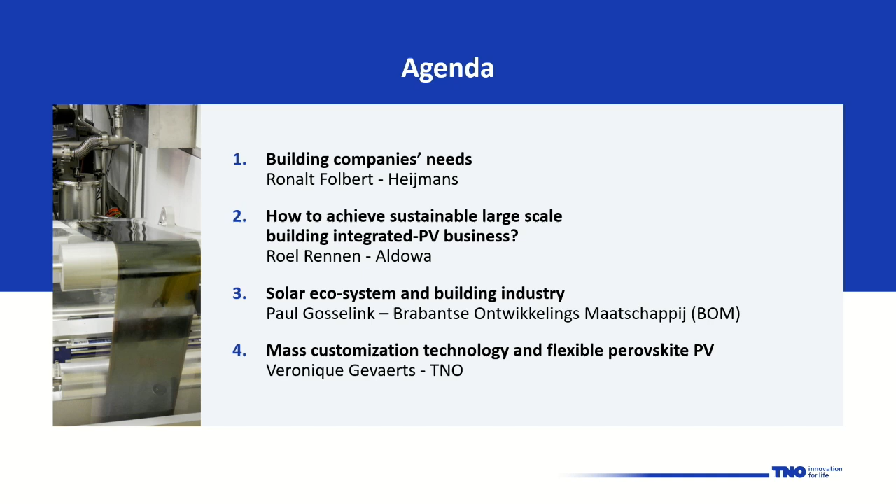In this webinar we will start with the agenda. First Ronalt from Heijmans will discuss the company's needs for buildings, and what their vision is for energy supply within those buildings. Next, Roel Rennen from Aldowa will explain how this can technically be done and what they are doing as building material suppliers. Then Paul Gosselink from the BOM will talk about the ecosystem in Brabant and their vision on making and manufacturing PV in the Netherlands and Brabant specifically. Finally, I will tell you about the technical status at TNO and where we are with mass customization technology and flexible perovskite PV.

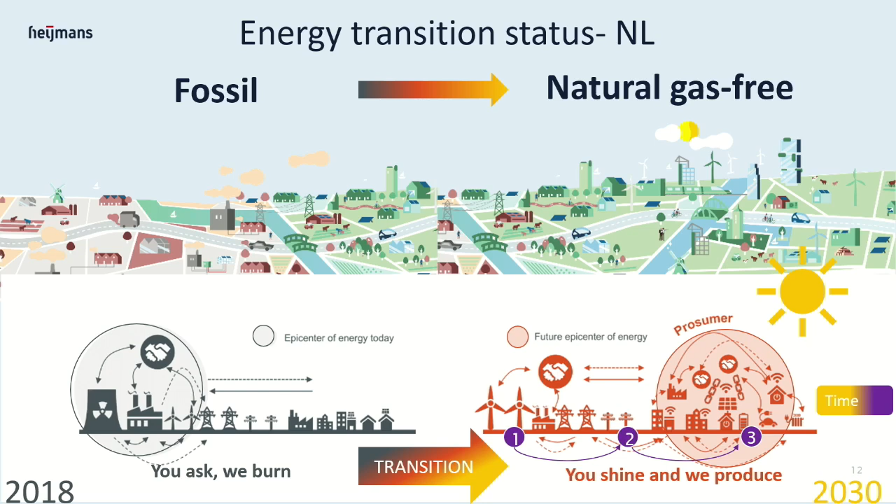And we are now changing to the right side. In the purple, you see the steps. Since 2018, from my perspective, we are changing from a central network more to a region.

And for number 3, it's more in the area what we built for, so there are more districts. We are already building energy positive houses, and in the future we should also build positive energy districts. Therefore we need PV more in our area.

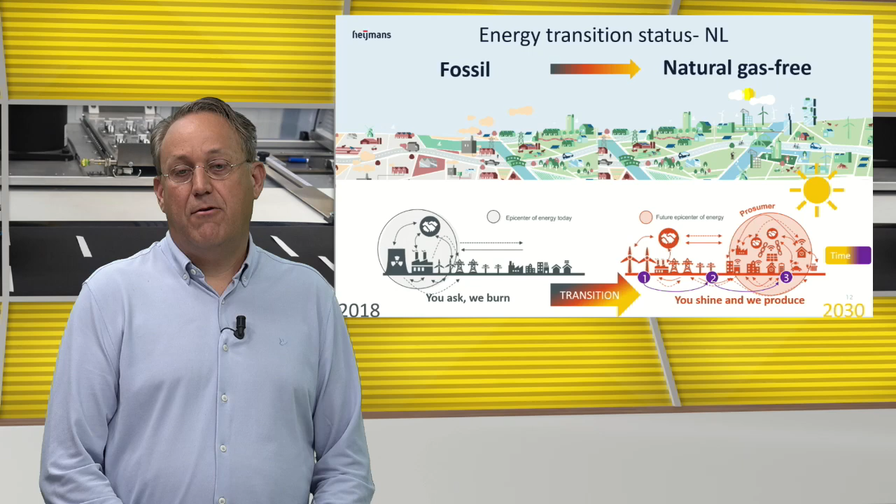That's the reason we think we should make more impact together with you. For that reason, building integrated PV is something we need, because we don't want to load the network. Financially it's also important for the consumers. An issue is still the regulations, and that's the main one, but that's coming later in this presentation.

And to be sustainable, it's also necessary that we make local building integrated PV here in the Netherlands, so people can lay back in their chair and enjoy. So what we like as Heijmans, we take care of each other and make sure things get done. Together we make it happen.

It was a short notice. Later on, more technical information. But I want to hand it over to Roel.

Thanks, Ronalt, for your vision on what needs to be done within the built environment. I'm very happy to hear that Heijmans Energy is, yeah, it was brief, but it's good to know that you're very, very committed to this topic.

Having said that, to be able to build, or for Heijmans to build houses of the future and have building integrated PV there, of course there's a need for suppliers that actually make this building integrated PV. That part will be covered by Roel Rennen from Aldowa, who will tell us a bit more and share insights from his company. Okay, please.

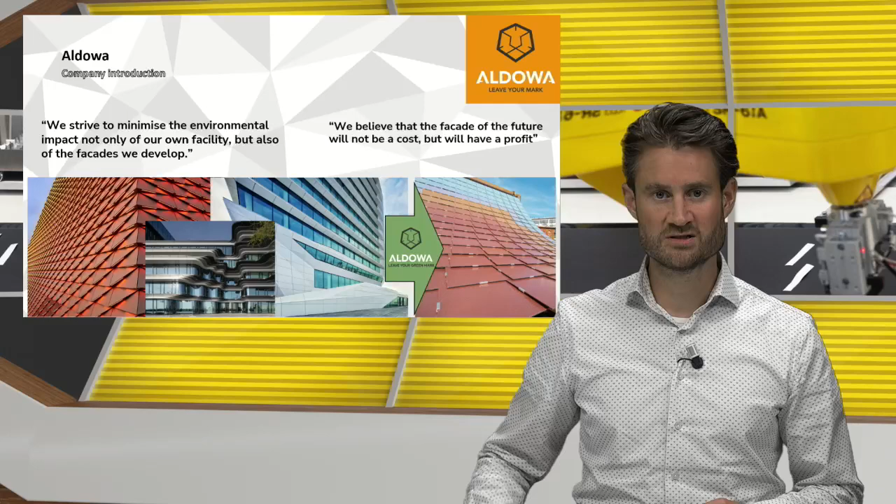So first, to give you a picture of what's available these days in BIPV products, we see a separation of two different kinds of facades you could make. First, of course, a standardized black, usually framed module you could implement. But of course, that has its limitations on size and on aesthetics.

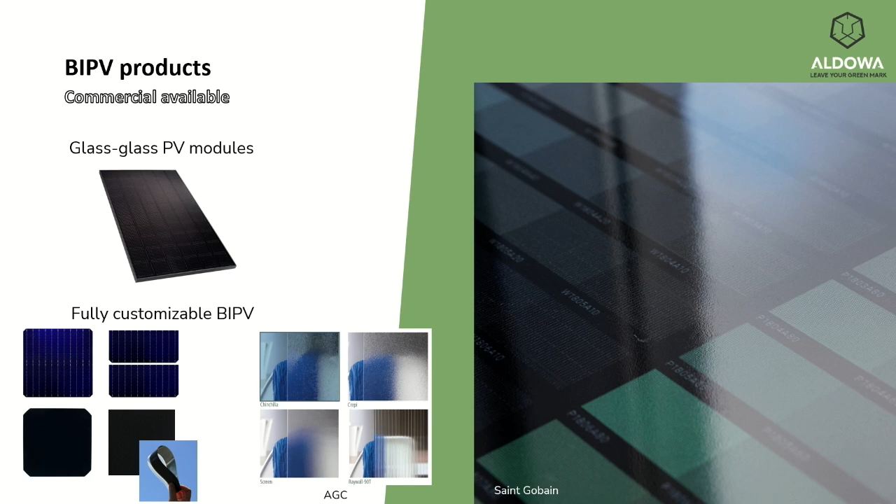Luckily, we have the option to fully customize our BIPV modules, so we have a toolbox where we can pick from. We have different cells - crystalline, half-cut cells, IBC. You can think of curving, thin film cell technology. We can combine that with different types of glass, change the position of the junction box, and play around in all sorts of directions - even going to triple glazing with cells in between.

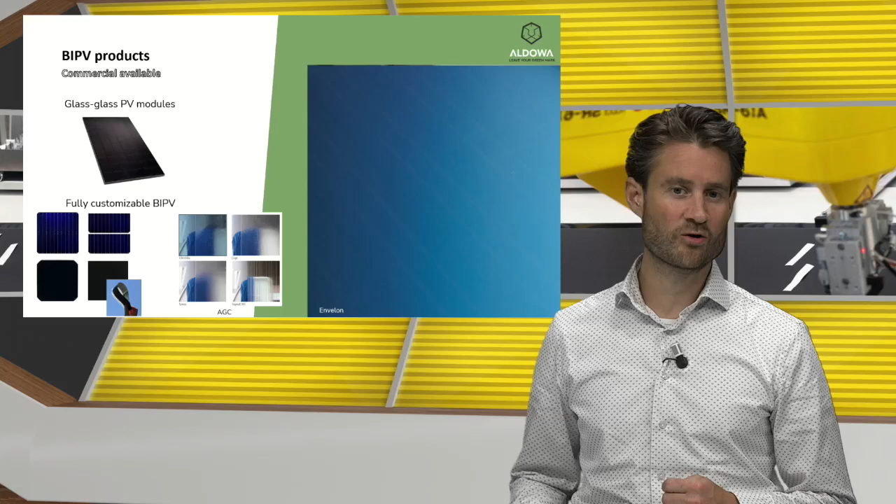As you can see, I will guide you through some aesthetic options. You can add some coloring to it. So this, for instance, is a metallic type of color that can be observed from one angle - it should be very bright, and from another a bit more dark.

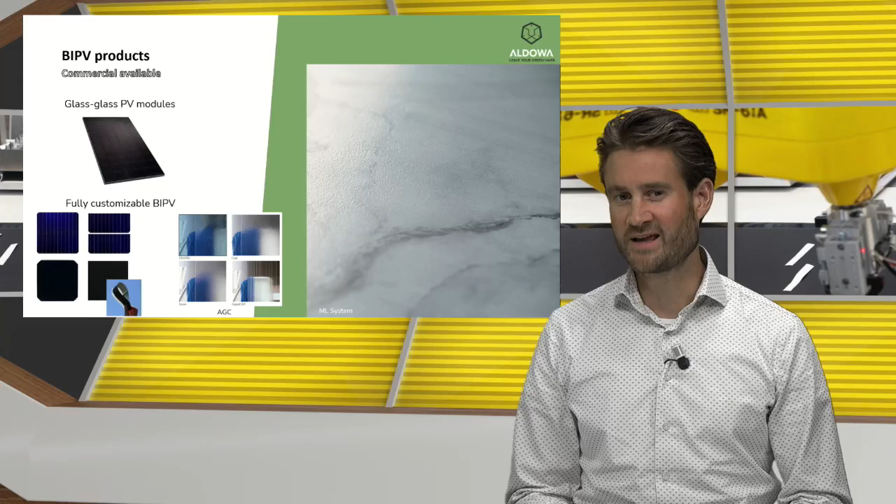You can think of patterns on the solar modules, up to full images created by dotted patterns, or this - the most extreme option - where there's a fully full surface print, a photorealistic print with structured top glass, so that it imitates actually another type of product.

So I would like to give you a bit of a background what we face in our building industry. There's a few main drivers for the BIPV market these days. We come from, let's say, 10 years ago, when there were only a few projects being realized. There was not a real demand for solar in the facade because it was very expensive.

Now these days, there are a few things that help the solar market a lot more, because we have regulation in place. The BENG regulation, bijna energie-neutraal gebouw, or near zero energy building, which demands, especially for office buildings, 50% of the total consumption of energy should be generated on the building itself. That's not only the electricity, but also the warmth or the cold.

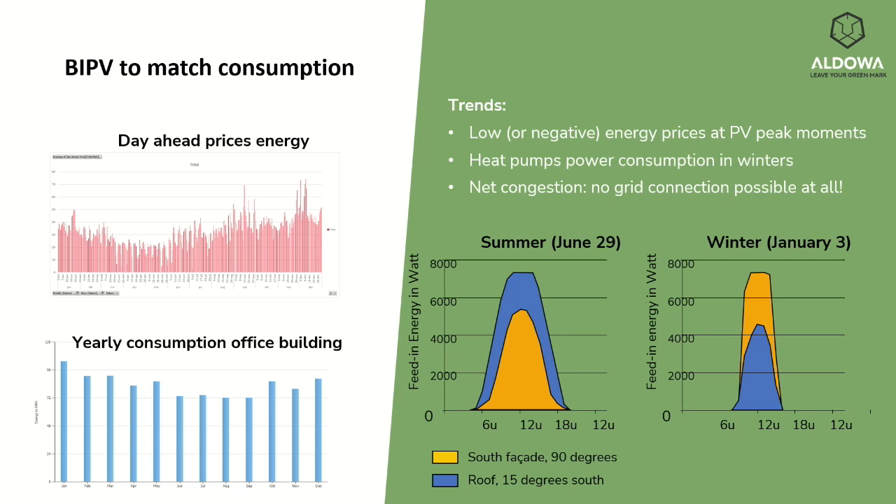So if you look at the top left image, you see that development. And if you then compare it with the energy consumption of, in this case, office buildings, at the bottom left side, you see that there's an extra demand for electricity in winter situations. Of course, that has to do with the extra power that heat pumps will need.

If you then translate that to BIPV compared with rooftop installations, you see these two graphs at the right side. In the summer situation, yes, there's of course a lot less energy being generated on the facade. But if you then realize the energy is worth very, very little, or even you get nothing for your energy, it's not that very interesting.

On the other hand, in the winter situation, you generate a lot more on your south facade if you compare it with a rooftop installation. And that's, of course, the challenge we need to focus on - to match the generation of electricity with the consumption. And BIPV is perfect for that.

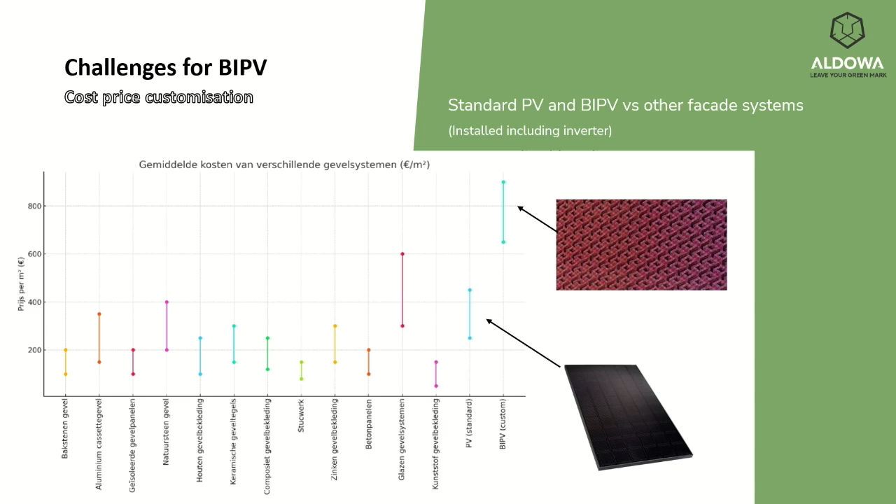But still, the fully customized modules were far away from the prices needed to compare with other types of materials. If you consider replacing another type of facade material with a standard solar module, you could deduct the price of the solar installation from the original facade cost, then you can think of a return on investment of 2 to 3 years, which is already quite a no-brainer for installing solar modules compared with other materials.

If we then look at an add-on panel, of course you still have the cost for your original facade, and you put on top the cost for a standard solar module. Then this ROI is a lot worse.

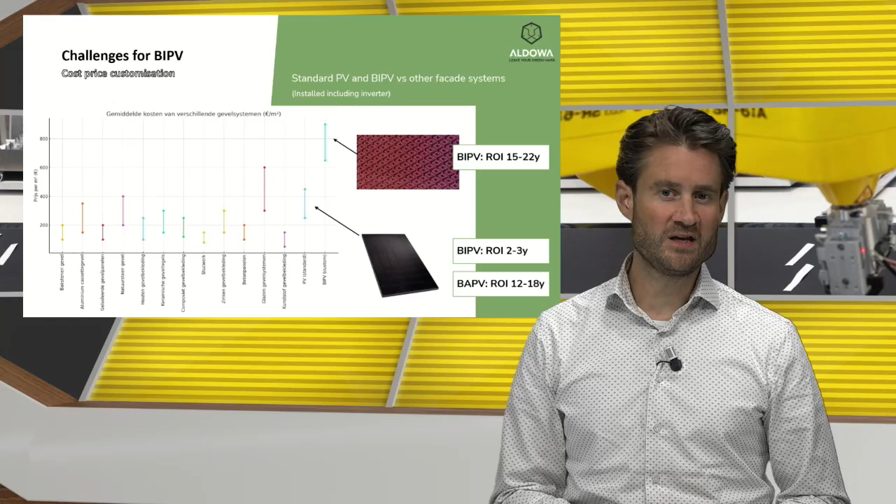And then again, to do the same calculation for BIPV, replacing the material and deducting these costs, we're facing 15 to 22 years these days.

And of course, yes, there are a lot of side notes to be made with it. Other challenges we face — this is a very important one.

Basically all materials have their shadow costs. That means from production, mining, creating the product, including transport up till recycling it, they come with a certain CO2 emission.

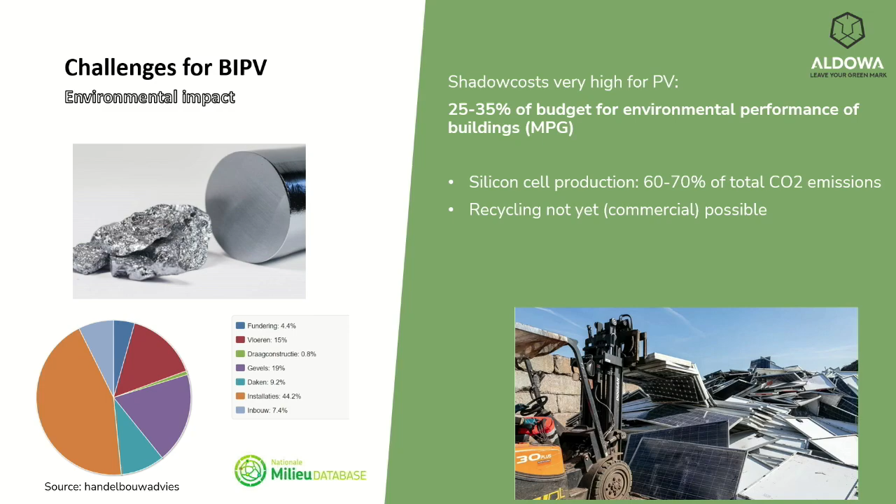And actually, PV is one of the worst you can get. The production of cells, of crystalline solar cells, is very energy intensive. So that's a real challenge.

So you can see here, of the total budget of a standard office building, for instance, almost 25 to 35% of the total budget for all the products included in this building will come from a PV installation. And that's only the essential PV that you need to reach the BENG norm, so it can be even a lot more.

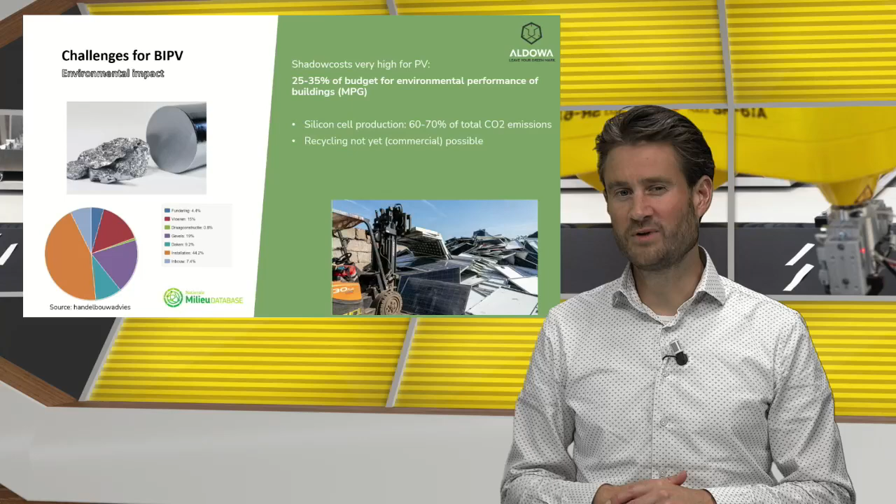Then there's this other obstacle that is creating this high shadow cost, and that's because the cells or the modules themselves cannot really be recycled in a commercial way these days.

So then I come to the conclusions, and describe the needs we would like to have for our building industry to accelerate. Of course, we would like to have a lower cost for BIPV modules, that's for sure.

How can you achieve that? Of course, you could think of lowering the price by robotized pick-and-place machines to create custom-sized modules. Or you could think of cutting products on site, or integrating production of semi-finished products that we can easily implement in other construction materials.

Yes, of course, you can think of the traditional building materials as shown at the bottom, but you can also think of completely new types of products, and I challenge everyone to come up with them.

And of course, as I already mentioned, the shadow costs are a big issue. So changing to a more sustainable way of producing solar cells, or other types of cells, would be very helpful. And of course, if we could recycle them, that could as well help a lot.

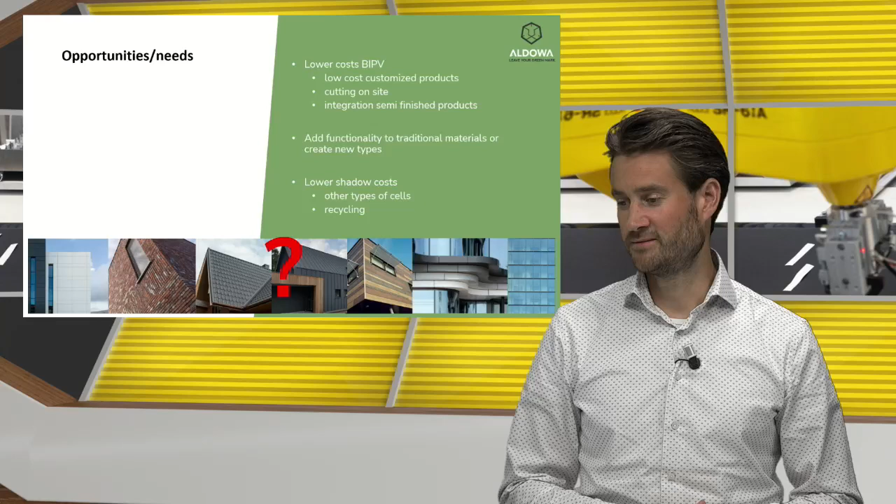Thanks a lot, Roel, for this inspiring talk. So we can actually see what's already possible, but also that there's quite a number of technical needs still to be addressed. I do have a few questions from the audience.

So I would like to start with a question for Ronald. One of the questions is, what do you think is needed to make sure that BIPV is used, from an economical and technological perspective?

Oh, I think Roel mentioned already in the latest sheet — the cost price should also go down, but also the regulation. And especially to make it happen, we need products, because we are building it, and we need products we can use and introduce in the sector. So we need products, and then we can build it. So cost and products. And go — take action. Yeah, take action.

And indeed, you mentioned quite a number of things already, Roel, in your presentation. Then we have another question from the audience, and I think that's for you, Roel: how does BIPV compare to an east-west rooftop installation?

That's a good question. We've run these simulations, and you still see that there's limited production in the winter situation, because in a usual east-west orientation there's a limited slope, up to 10% or 10 degrees, and the sun is at a very low angle, so it barely hits the surface of the solar modules. So a south-oriented solar module on the rooftop actually performs better than an east-west one in a winter situation. And that's the challenge, so we need to focus on the winter situation.

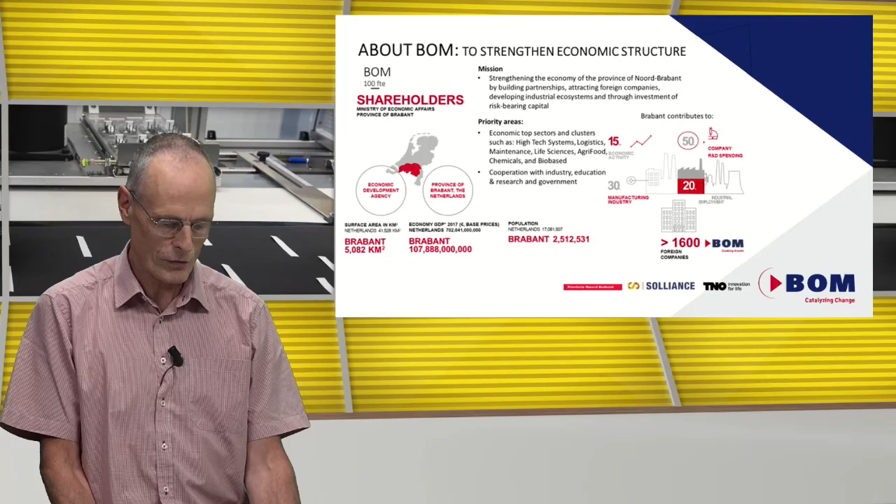We look from an economic perspective, and from a fair SWOT analysis, we look at how we could develop strong clusters that could be competitive with new kinds of products. I'll tell you a little bit more about that later on.

About 13 years ago, I think, the province of Brabant, together with TNO and the Energy Center in the Netherlands, joined forces, and at the High Tech Campus in Eindhoven, Solliance was erected, focusing on thin film solar R&D. Within the same period, you could say, from silicon PV, the Chinese industry grew, and with several 5 or 10 year plans from the Chinese government, within 5 to 10 years the Chinese took over and are by far the market leader in silicon PV.

And the province said to us, well, 13 years ago we had the idea of setting up focused R&D on silicon PV, and with the high-tech industry we have, famous I think all over the world, we thought we could at least do some development and sales, marketing, and production of equipment to produce solar PV panels. But well, that failed.

Within the new TNO strategy, and also as mentioned by Roel Renner of Aldoa and Ronald Volbert of Heijmans, we saw that there are new opportunities, focusing on what I call a smart specialization strategy. We won't compete with and we won't try to defend against the Chinese on silicon PV, but within the zero carbon emission ambitions that exist, and not having a food-for-energy discussion...

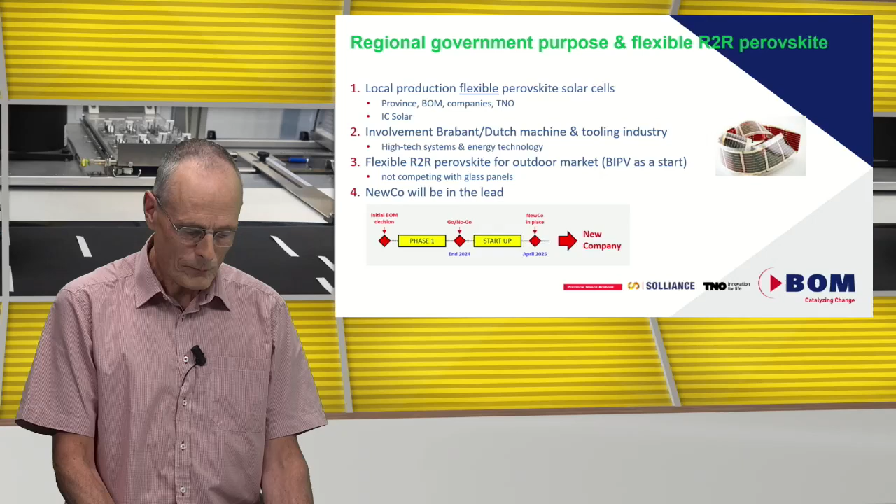In order to learn from what went wrong a number of years ago and where the possibilities are, we use an ecosystem model, derived from research done by Erik Stam from Utrecht University and also work by Mr. Raspe from Planbureau voor de Leefomgeving. We are looking at the ecosystem within the challenge we have defined to develop a new thin film PV industry.

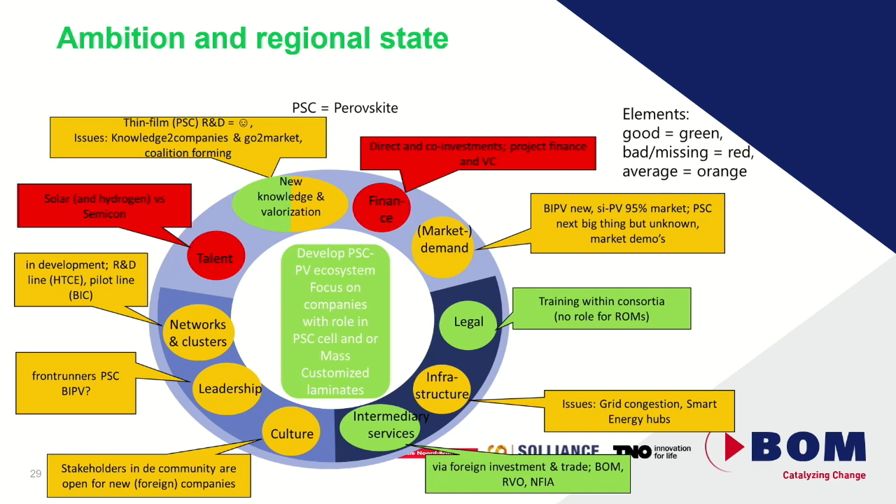Of course, talent. As we all know, there is a lack of skilled people, and we have a big health industry and a big semicon industry. So to set up a good thin film PV industry, you should have production as much as possible automated and robotized, which could also help lower the cost price of the product. We also looked at networks, clusters and leadership.

We have a big high-tech industry in our province, but the focus is on high complexity, high mix, low volume in semicon and health. A number of companies experienced failure in supplying equipment to the silicon PV industry, so we had to convince them that energy technology, especially thin film PV, could be of potential benefit to them and could be a potential business case.

Another one you see in red is on the finance side. It's the same in America, for example, but also here. There is Repower EU, but the first factory and the first products are always the most expensive, and there are a lot of risks, especially in thin film PV. For new facilities and production processes like this, it's very hard to convince venture capital and banks to invest in this kind of new technology.

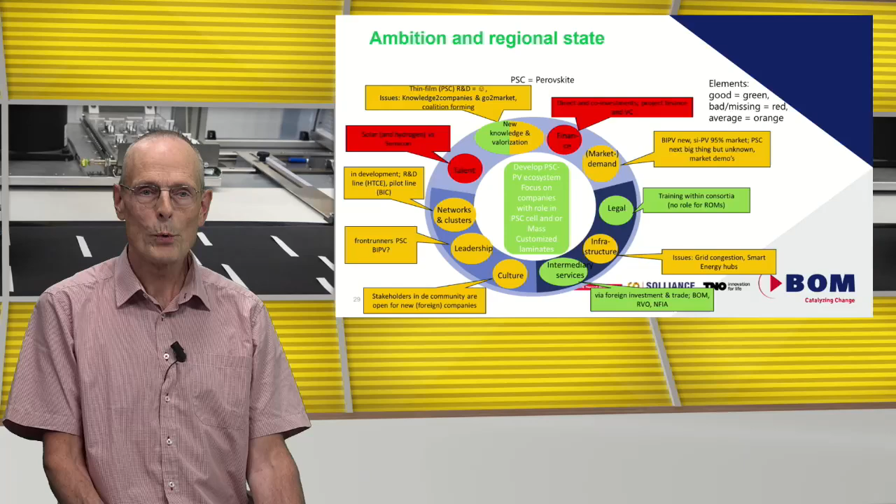So we have to develop as convincing a business case as possible to help convince investors to invest in this kind of technology. Within this ecosystem analysis, we set up a program to develop a regional approach combining the thin film perovskite production cell and the equipment industry.

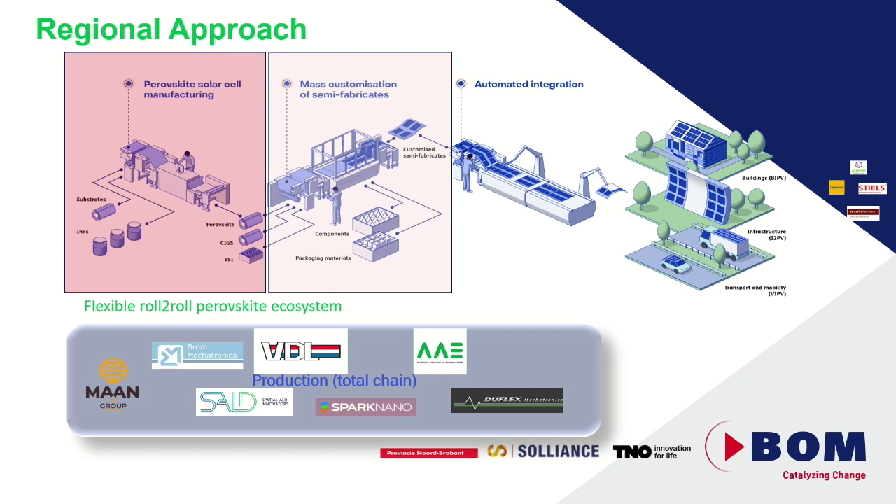Veronique will explain later more on this production process, but it is in 3 steps. First, you have to produce the flexible perovskite cell in rolls. As Roel said, shadow costs should be taken into account. Some LCA, life cycle analysis, has been made, and it's only 40% compared to silicon production of PV cells, and it is recyclable. So we think we have here a competitive advantage.

Those cells in rolls could be sold, for example, to Solarge, an upcoming company doing very well, producing lightweight energy systems for roofs. Right now they buy Chinese cells, but these rolls could be bought by them instead, giving them a complete European product, for example.

But it could also be laminated. That's the second step, and then you have a combined product that could be used by Aldoa in their facades, for example, or by Heijmans to meet regulation demands.

There are some challenges on the material side, but also on productivity, and we brought the companies together to develop a full-speed production process. We think within 2 to 5 years we can have a 1 gigawatt production facility in our region up and running. In the meantime, together with the companies here, we want to demonstrate that it's also working.

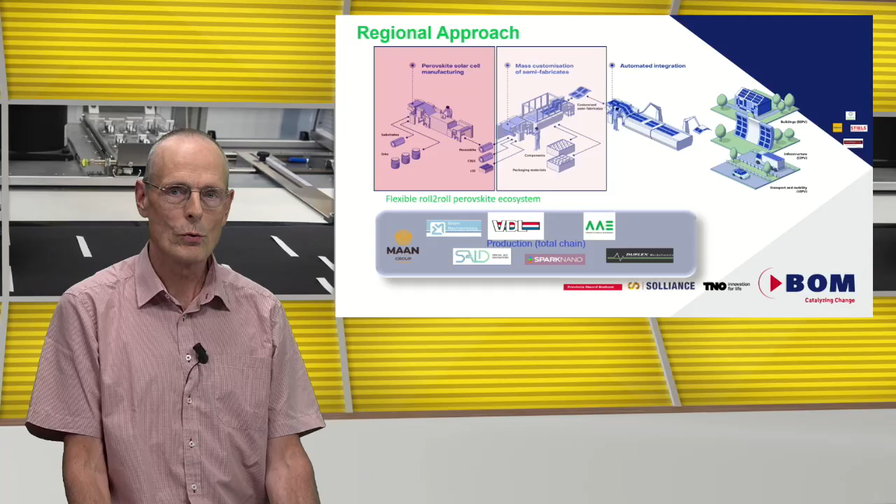This is a little bit about our regional approach. We're not doing it alone. Veronique and her team, with Sjoerd Veenstra and Peter Toons, are working both on the production, the industrial research and getting ready for production, but also on the application side. I have some expertise from outside, and a colleague from Ventures who is setting up with me the business case for the new company that should be on its own feet next year.

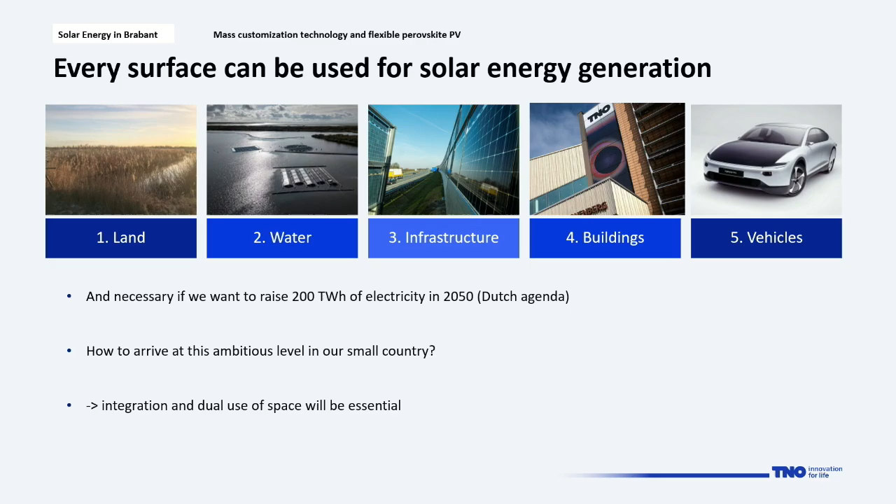If you look at the big assignment we have within the Netherlands, the production of energy needed is enormous. In such a small country, you cannot just cover everything - land, water, or agricultural grounds - with PV. You need smart solutions. We do that in different topics, but also integrating PV into the built environment through building integrated PV, and dual use of space is very important.

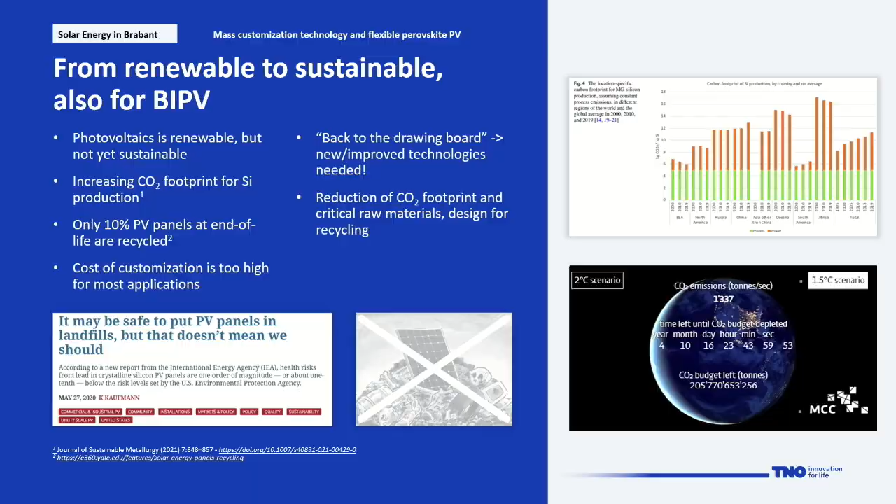We all want to do that within preferably the 1.5 degree C global temperature rise scenario. If you look at the carbon clock on your screen, this is a screenshot from last Thursday - you can see we only have a bit less than 5 years left. That's not much. If you want to have energy supply fully done with PV, more than 20% of this carbon budget is needed to make this happen. That's way too much. So as our former colleague Wim Sinke used to say, we need to go back to the drawing board - back to where we started, look at what materials we can use, should use, and absolutely should avoid.

So looking at critical raw materials, looking at the CO2 footprint, and looking for recycling - recycling of the current standard, but also design for recycling. If you want to know more, we hosted a webinar in November last year, which can be viewed on the website, where my colleague Martin Speet explains a lot more on this topic.

What we do at TNO is technology development for building integrated PV, things beyond what is currently produced in the market. We look for integration either using roof tiles or facade elements, art-like facade elements. So there's two flavors: either looking at aesthetics, making them seamlessly integrated into the building so you cannot see that you have an energy-producing facade, or there's some aesthetics where we want to express that there's PV in the facade.

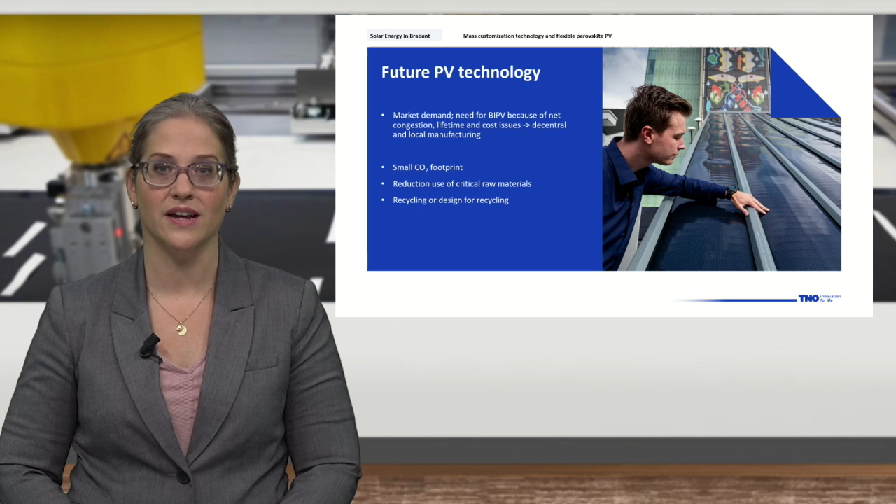So if we look at the future of PV technology in the built environment, in this case it's visible from nearby, but invisible from far. You can see my colleague here looking over some mass customized rolls of PV - very long, non-standard modules made with flexible, lightweight materials that have a small CO2 footprint. There's a reduction of critical raw materials compared to standard PV modules, and recycling can also be easier. That's one of the points we focus on in technology development.

Paul already shortly mentioned the Innovation Coalition in Brabant, trying to build the future of PV manufacturing in Brabant. This was signed about two years ago by TNO, the province of North Brabant, and the BOM, where the idea is that we set up together in Brabant the local production of PV, being perovskite in roll-to-roll fashion, and mass customization that will make seamless integration into all sorts of elements possible. So we try to combine all the aspects from technology to economics within this coalition.

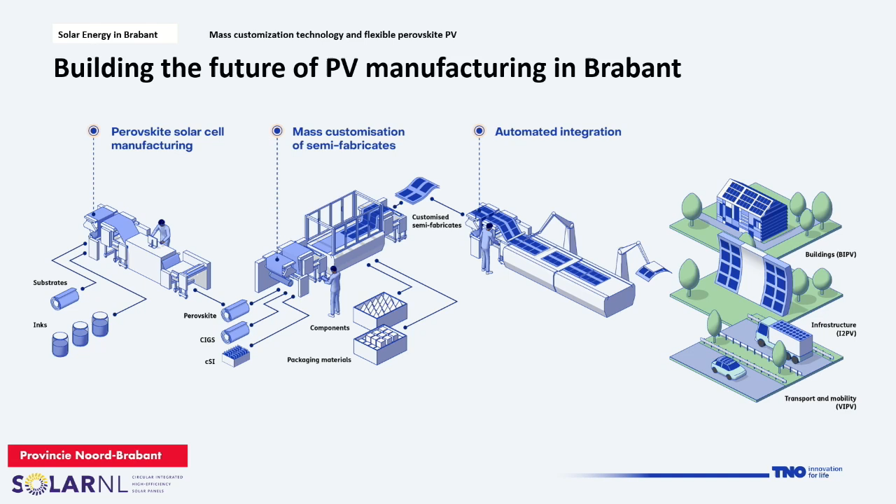This is what a blueprint could look like for building PV manufacturing in Brabant. This is together with the province of North Brabant and the SolarNL Growth Fund, where with a lot of partners we all work together getting things done—from a technological part by TNO, in between the universities, the academic world, and the companies on the other side. I'll explain a bit more about the first two parts, since integration into the other parts is covered by our friends here at the table or in a different webinar.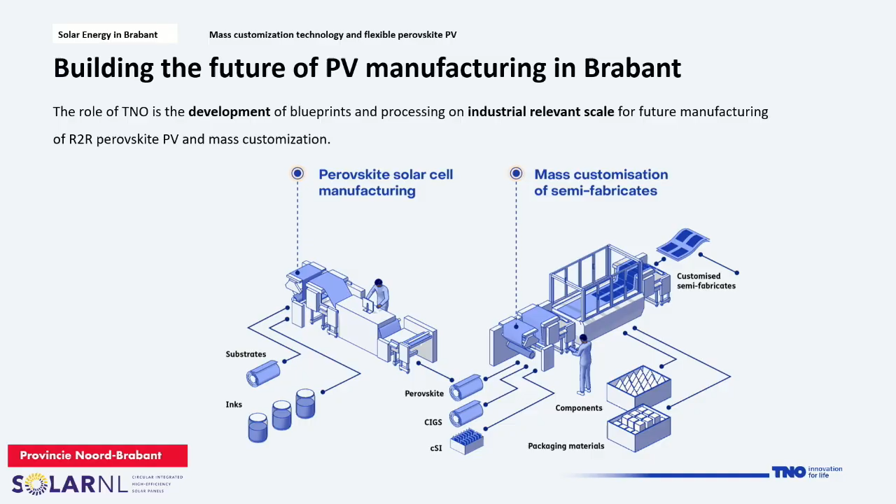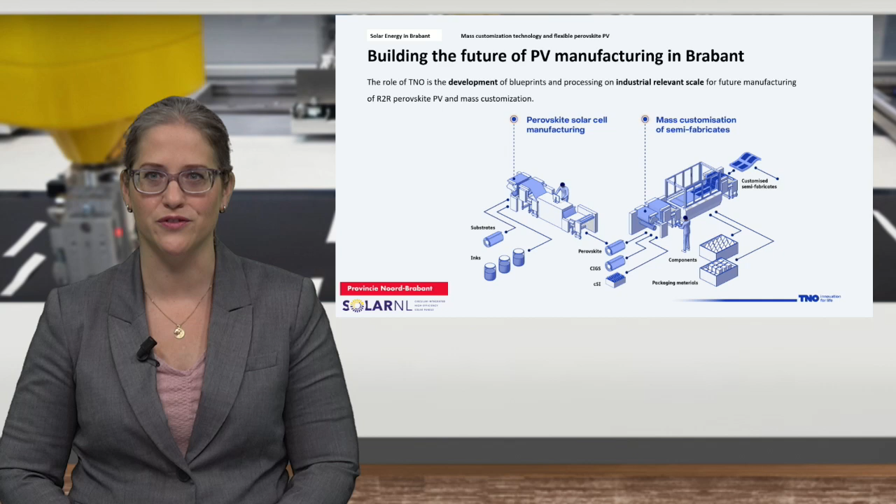So building the future of PV manufacturing in Brabant focuses on roll-to-roll perovskite and mass customization of what we call semi-fabricates. That means what comes out of that roll-to-roll machine is not necessarily a full module, but can be cut or sliced, or these are materials that can be integrated into other products, such as building elements, as mentioned by Aldova. So the role of TNO here is really development of these technologies and innovation on an industrially relevant scale, without actually becoming a producer ourselves. I think that's important to mention.

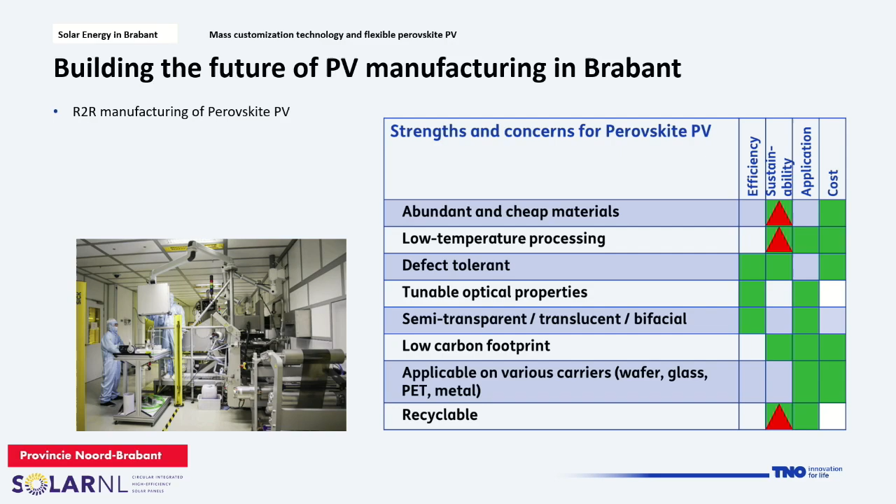Looking at the perovskite part, there are a lot of potential advantages that perovskites bring to the table. One of the main aspects is the roll-to-roll manufacturability of this material—these can be ink coatings, which means like printing a newspaper, you can achieve high speeds, high automation, and mass production. If we can afterwards cut these into smaller pieces and make them customizable, that's why we think we have a win-win combining roll-to-roll manufacturing of perovskite with mass customization of PV semi-fabricates.

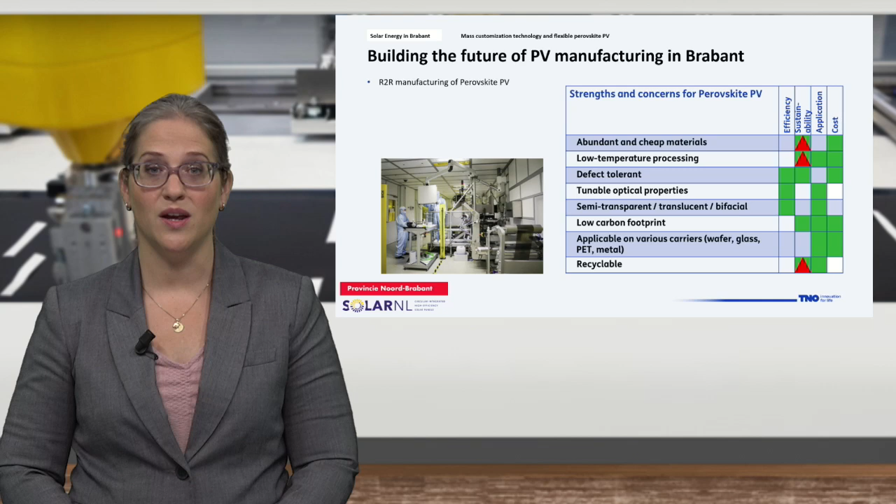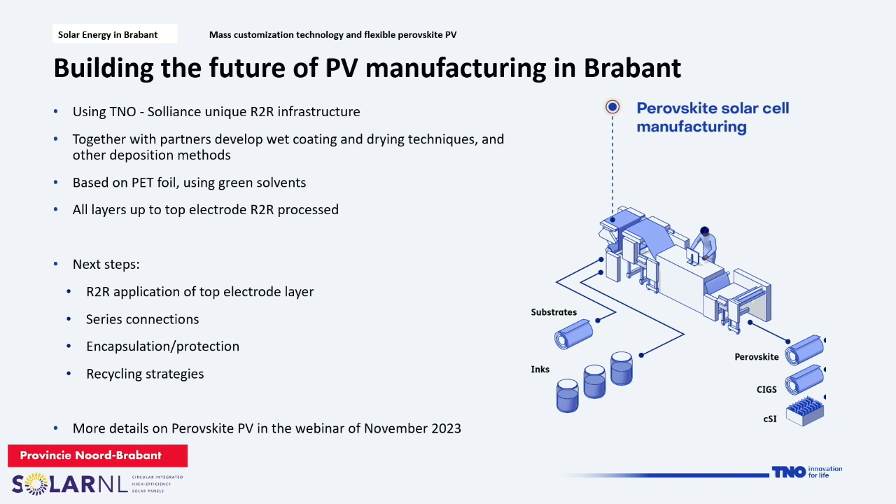This is an example, a view inside our clean room, where we can see a couple of my colleagues working on the roll-to-roll coatings. This is really still technology in development, improving on a few specific topics. Together with partners, we develop these wet coating techniques mainly, but also the drying of these wet coatings and other deposition methods. The top electrode is something which cannot currently be done by a wet coating technique, so that's still ongoing development. Everything is based on PET foil using green solvents, so sustainability is very much in our minds.

For the next steps, there's the top electrode layer obviously, but also the series connection between cells, which is more of a technological aspect, as well as encapsulation and protection from the environment—protecting the PV materials from wind, water, temperature, and everything else. Recycling strategies are also important here, so design for recycling matters as well.

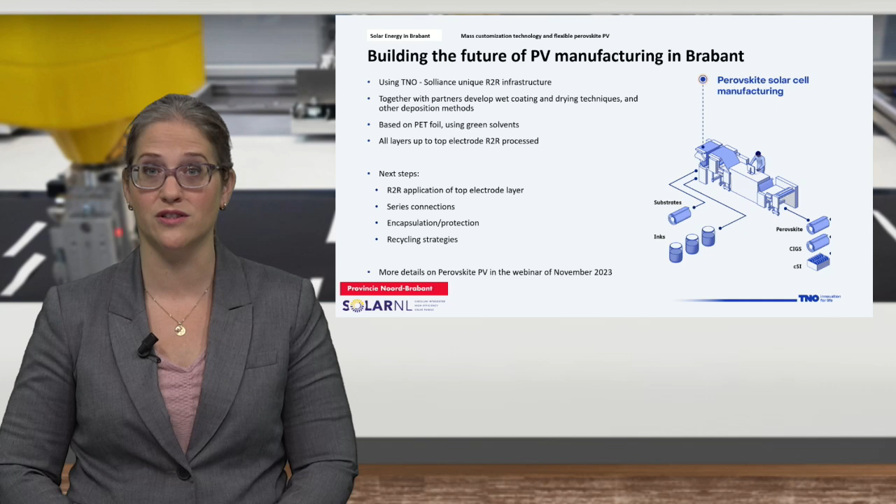If you want to know more details on perovskite PV and the approximate status of where we are right now, you can view back the webinar from November, where my colleague Sjoerd Veenstra also shows a very nice movie of roll coating a perovskite layer.

Then I'll move on to the other unique piece of equipment we have, called the mass customization line. Together with equipment builders, mainly MAAN and Duflex, we've organized parts of this machinery and equipment where we produce these large foils. We really do this from a research point of view, because this was never shown before—nobody has ever done this. It was always sheet to sheet.

What we see here is we're currently still working on the first generation using CIGS cell material, which is a flexible, lightweight, thin film PV material. We make modules that are customizable in shape and size, electrical output, and also the layer stack—where we can think about having a weathering protection layer on the outside if nothing is added to the structure, but also leave that out if we want to glue them inside a frame, onto a steel foil, onto a facade, behind plexiglass, or well, you name it, it's possible.

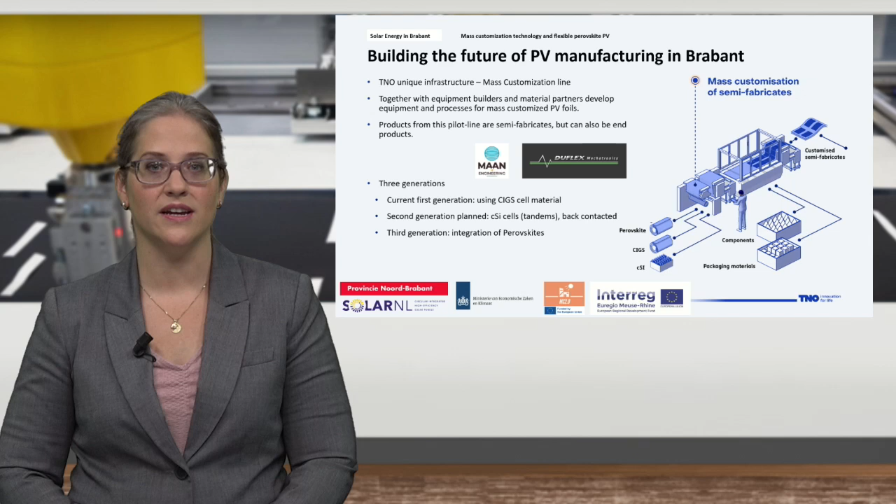There's also a second and third generation planned, which lie a bit further ahead in the future. But definitely the third generation, most important here, is the integration of perovskite into this line.

These are some of the unique features that the line has, which is pick and place of components. We can use bypass diodes wherever we want, if needed. As I said, freedom of design. We could also include aesthetic foils on top to already add color to the laminates and make different appearances, and the whole idea behind it is customizability.

And the rolled lamination, which is very important but also very difficult, because roll lamination means there's speed, there's time, there's temperature. Basically we try to glue all the layers together, and that needs time and temperature, which we try to minimize using this roll-to-roll process. So that's where the technology development of TNO is very important.

The next generations of the line will enable back contacting of cells, and we will try to use a generic design to be able to use all different PV technologies out there, ranging from crystalline silicon all the way to the other end of perovskite PV, and who knows what is next in the world.

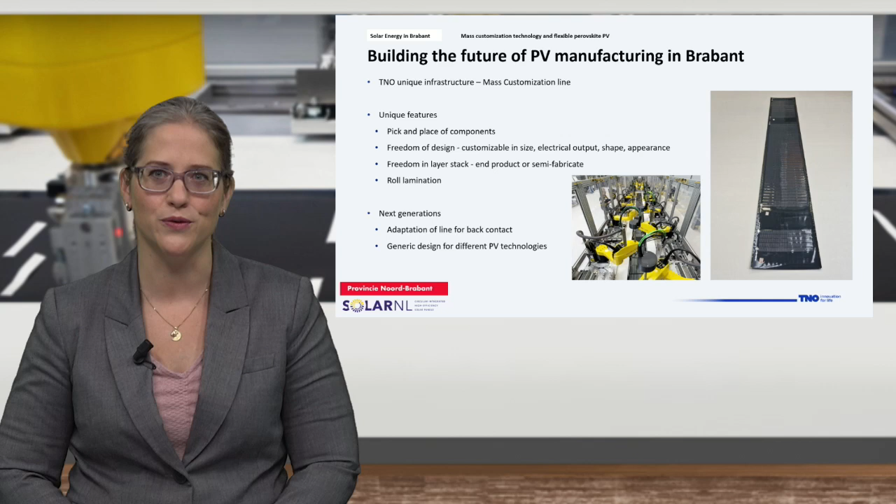Something about the status: the current status is that we have a baseline to do actual production. There is a specific bill of materials that we call our standard. It's customizable, and one of the things we are really looking into, which has to do with the roll lamination, is the lifetime of the product in the end.

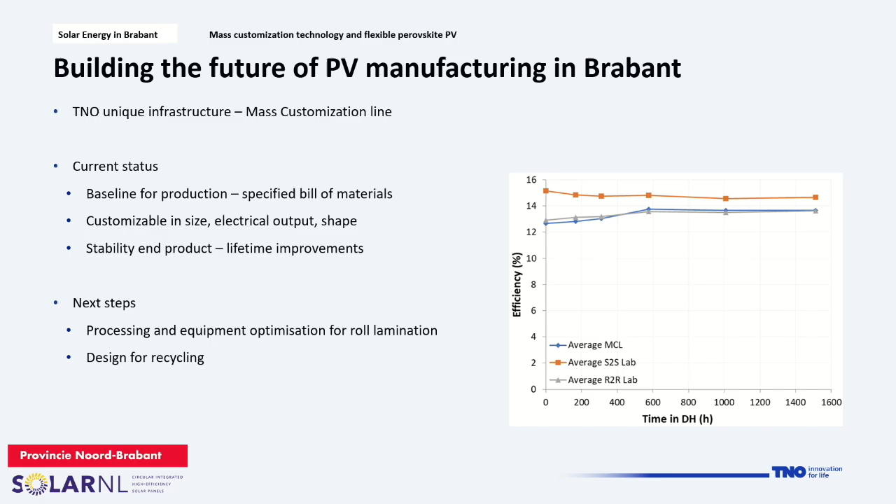You see a graph here where in blue there's the average of the MCL, the mass customization line, and we've compared that to what we can do on a sheet-to-sheet level. Sheet-to-sheet involves relatively high temperatures, encapsulation, and then we look at how the PV degrades over time. You can see that we are getting very close to what is standard from sheet-to-sheet in the lab. The gap is not zero, so that's our goal, fixing that first.

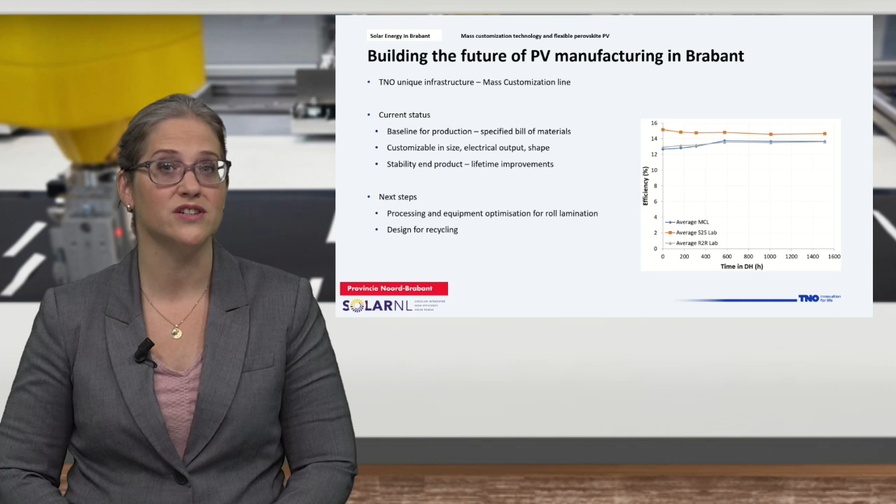And the next steps are design for recycling, because this is not included yet in the current bill of materials. But here too we can think about adding different materials or different ways to put them together, to be able to do recycling in an easy way at the end.

Then I come to my last slide. Looking into building the future of PV manufacturing in Brabant, TNO really wants to play the technological role here, where in the end PV will just be a functionality of your building. We try to make PV available for every surface, and we try to do that through the approach of mass customization, together with all the different partners, using different subsidy schemes.

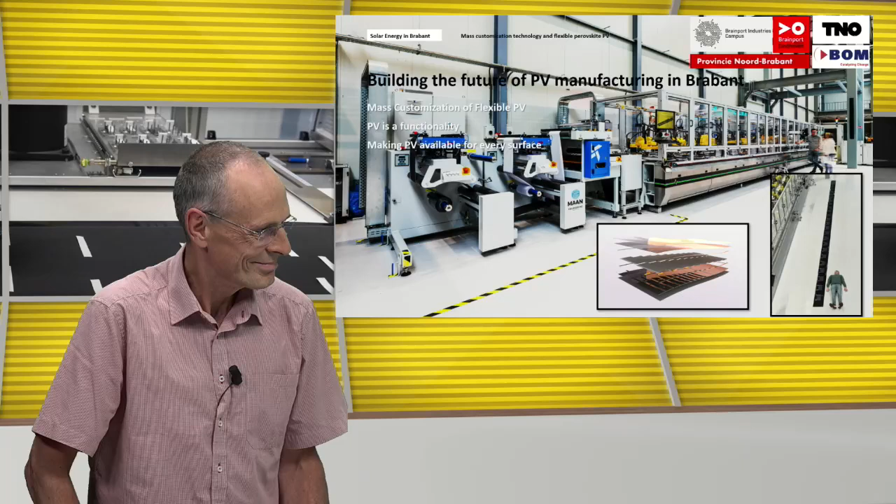I can add something on it. Well, let me go there. Thanks, Paul, for mentioning also a bridge to the next question, which is for you, Ronald. So then you can also make your other point, because I think this is connected.

Thank you. So the question is, why not a proof of principle, Ronald, by realizing an energy hub on an industrial area where builder, BIPV, government and energy company together show the feasibility, technically, economically, socially, of energy independence during all seasons? Technically, I think it is possible, because Roel mentioned something. You can harvest your cold, your heat, also your sustainable electricity. So everything is there, so you can build a positive energy district.

And is it for an industrial site? I think it's even easier than to do it for residential buildings. So I think it is possible.

Therefore, you need now, the new energy law, maybe as a first step. So why not the proof of principle is first we need some laws to actually motivate people. In the past we had the economics.